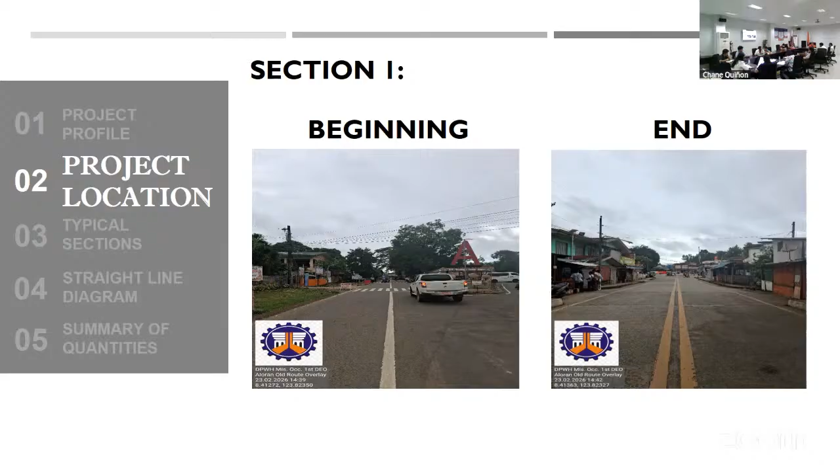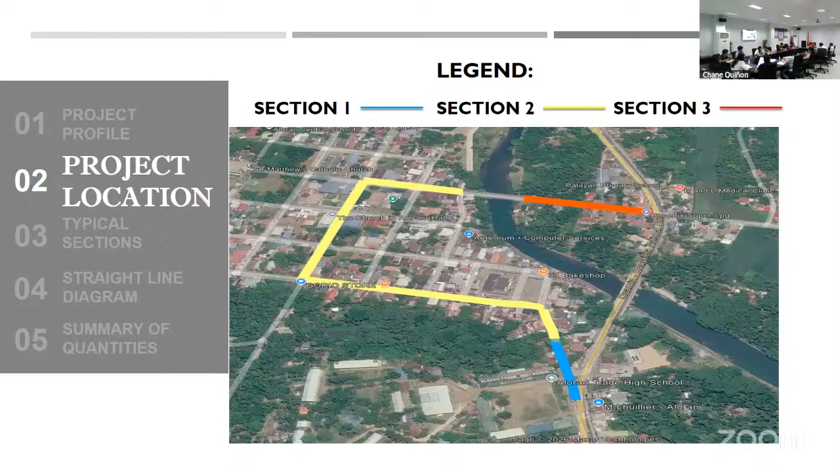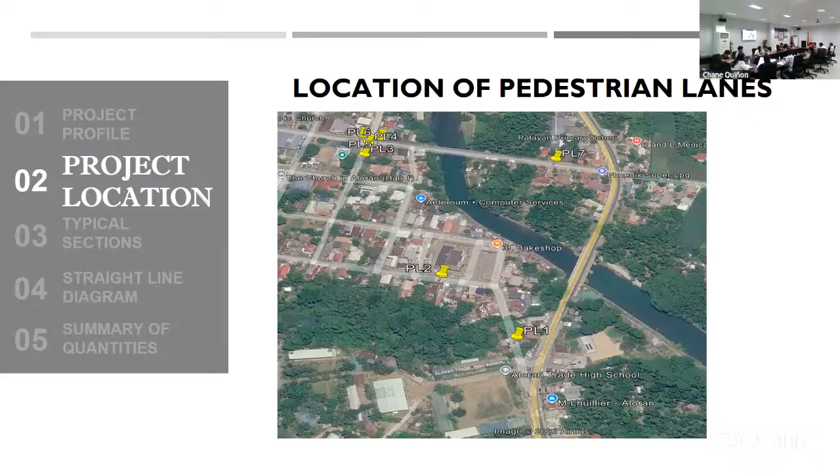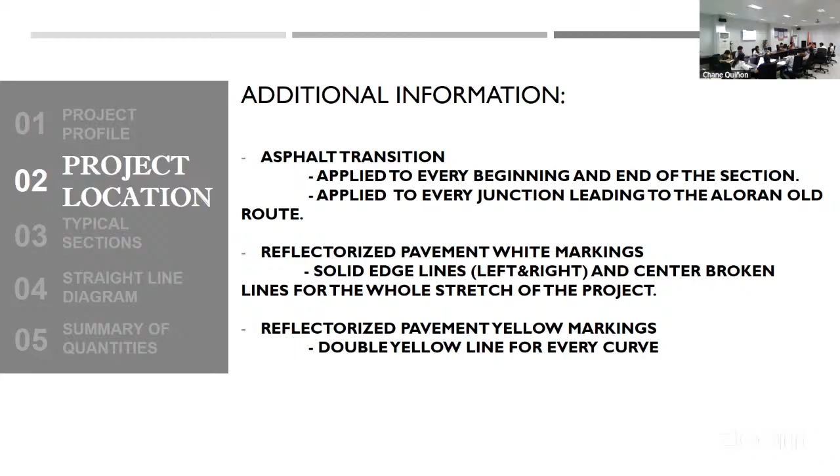Next, please. Additional information. An asphalt transition is to be applied at every beginning and end of the section throughout the project, and to be applied at every junction leading to Aloran. Reflectorized pavement white markings are represented by the solid edge lines in left and right, and center lines for the whole stretch of the project. And reflectorized pavement yellow markings are represented in double yellow line for every curve. Next, please.

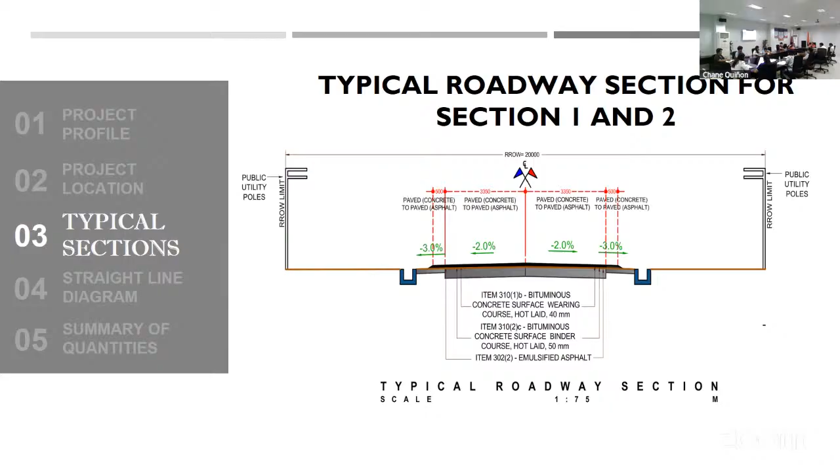Next, please. Now we have the summary of quantities. We have item B.1.1, the engineer, and item B.1.1.6, the operation and maintenance of field office for the engineer, which will be payable for the duration of the project, so that's 2.7 months. Then we have item B.5, the project billboard / signboard, 2 for the DPWH and 1 for the COA. Next, please.

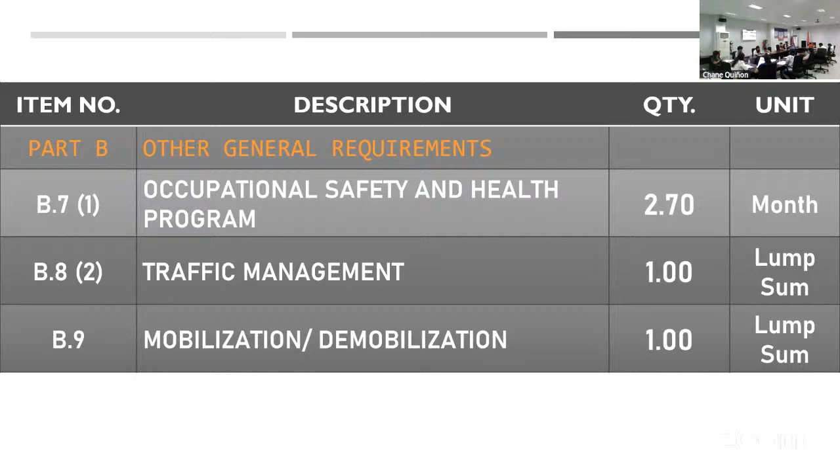We have B.7.1, occupational safety and health program, which will also be accounted for the duration of the project, so 2.7 months. And item B.8.2, the traffic management, and item B.9, mobilization / demobilization, which are counted in lump sums.

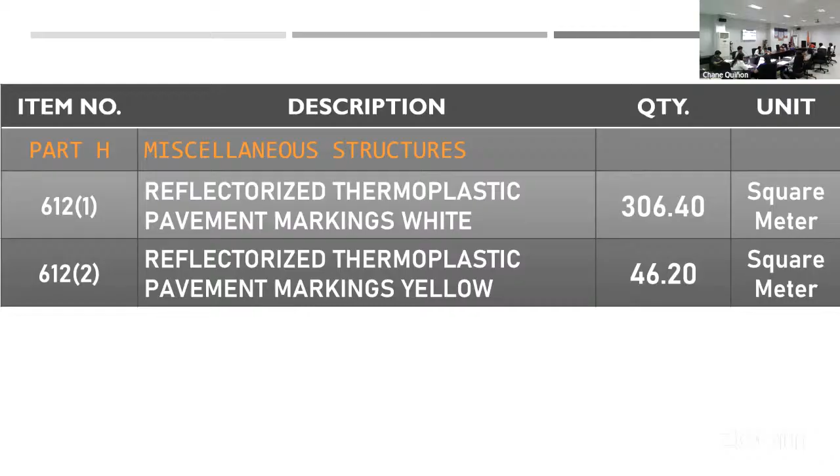Finally, we have item 612.1, the reflectorized thermoplastic pavement markings white with a total quantity of 306.40 square meters, and item 612.2, the reflectorized thermoplastic pavement markings yellow with a quantity of 46.20 square meters. Next, please. So that's the end of the session.

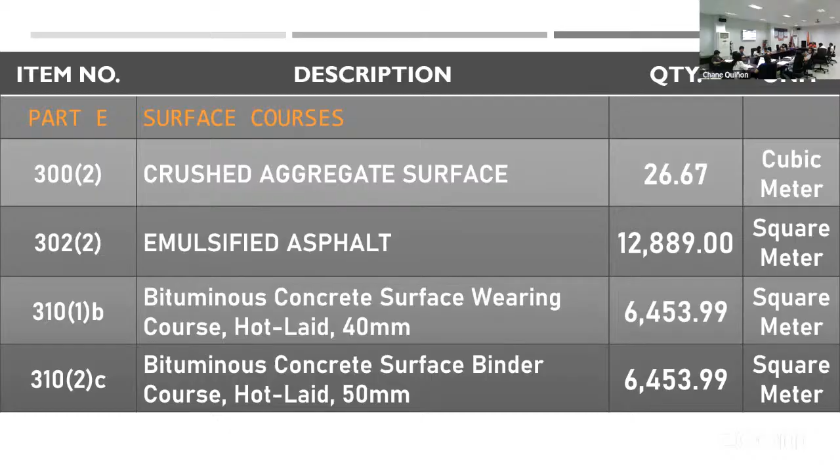As I said, very... Oh, yes, sir. Okay. We have typical sections like this. Yes, good morning.

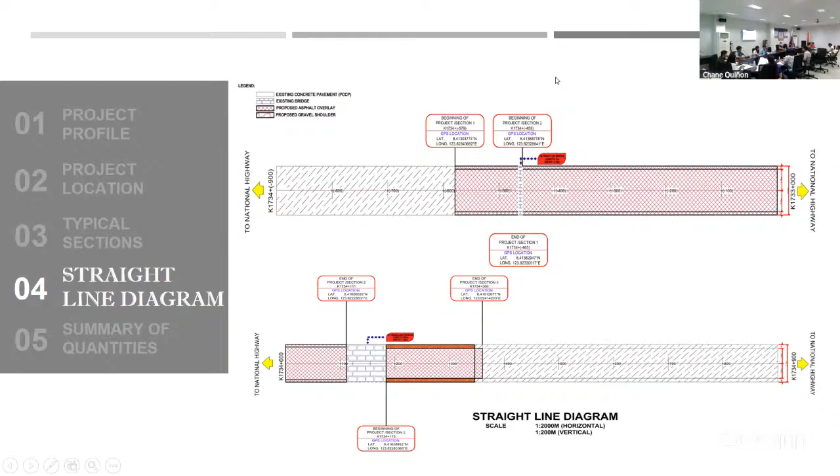So, any other comments and observation? Thank you, Engineer Balusa. Thank you, Dave. Other comments? Schedule. Schedule of opening of bids for these two projects just discussed, on July 28th, opening of bids.